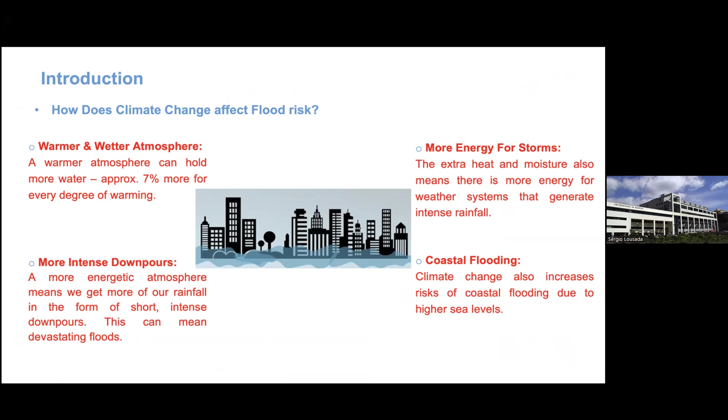So, what are the flood reasons? Heavy rainfall caused by natural weather events, insufficient forest, incorrect agricultural practices, inadequate design of drainage channels and structures, inadequate maintenance of drainage facilities, clogging by rubble brought by flood waters, and settlement of flood plains.

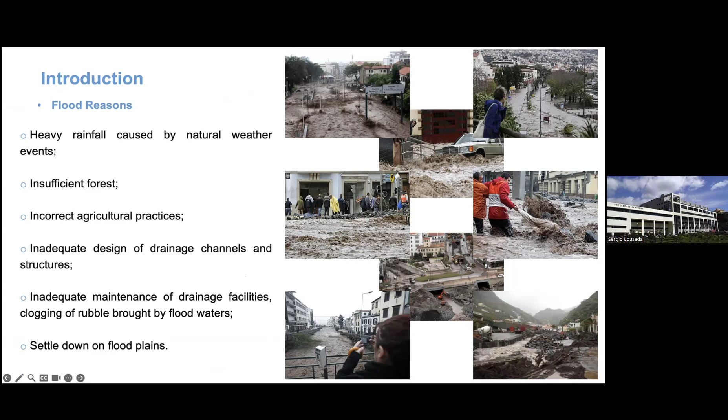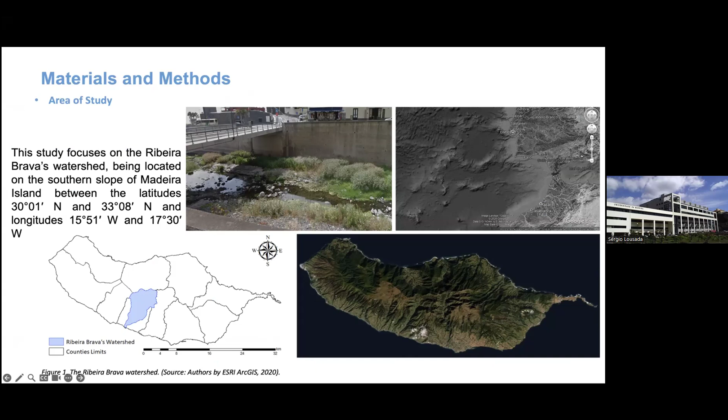So materials and methods. Next part, schematic of methodology. So we have six big steps to develop: literature review, watershed morphometric analysis, hydrological analysis, analysis of the drainage capacity of the river mouth, detention basin sizing, and definition of the roughness coefficient.

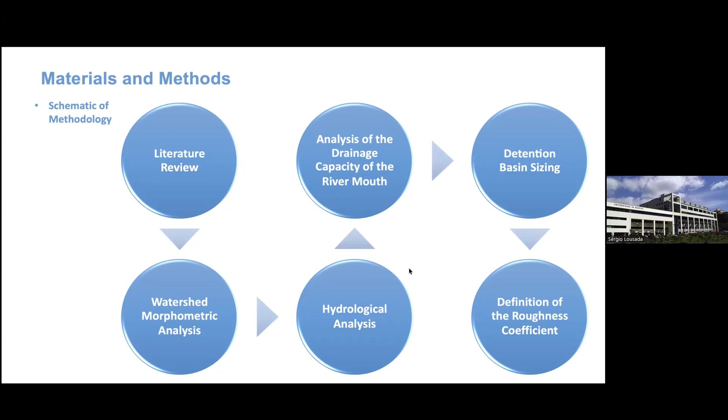So, materials and methods, morphometric characterization of the watershed. We need to achieve different values of different parameters to make an accurate characterization of the watershed, in this case of Ribeira Brava. Also, we need to obtain data about the last 20 or 30 years of precipitation. And all this information was given to me by the civil engineering laboratory present in Madeira Island. They give me this information, with which I can make the extrapolation of the precipitation for the next years.

So with this data, I can obtain the peak flow and I can obtain the drainage capacity of the river mouth of the mainstream of Ribeira Brava. And also, I can use two different methods, the Dutch method and the STH method, to achieve what is the most correct for the implementation of the detention basin sizing in the mainstream.

Also, I can make some modification in the roughness coefficient, that is, the materials that are put in the walls of the main streams. We can use concrete, it is the most correct to do. And also, this one is probably one of the best solutions because we have some limitations to make modifications in the mainstream, because the mainstream is already constructed and in its perimeter we have some streets and some buildings, so we have some limitations. We need to maintain every time the same height, so it's not possible to make this type of modifications. Next one.

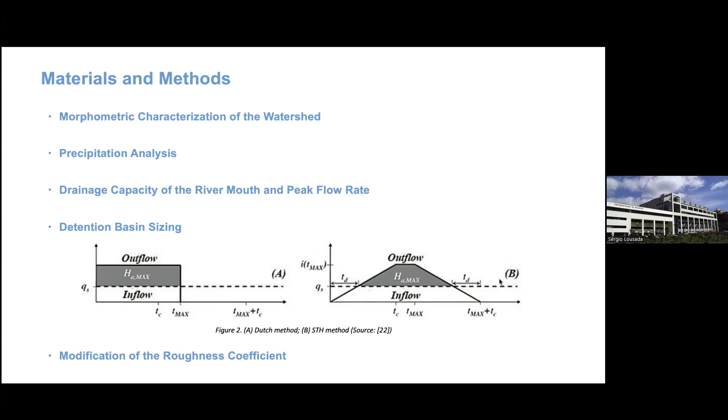So, like I have said in the last slide, we have to determine the area and some parameters, perimeter and length of the main watercourse. With the help of the ArcGIS software, we obtain all these parameters, and with this one, we can make the correct characterization of our watershed, in this case, the watershed of Ribeira Brava.

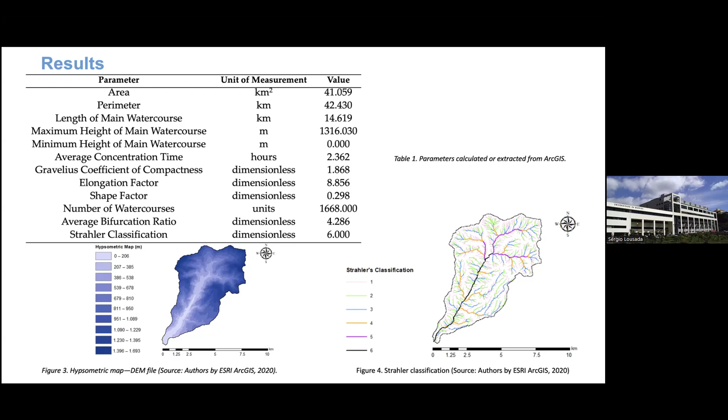So with the characterization of the watershed, with the help of the software ArcGIS, and also with the values of the precipitation, I can determine the peak flow rate with different methodologies, Forti, Rational, Giandotti, and Mockus. And with this one, I can apply the different methods to determine the detention basin sizing, and I can check if the length of our mainstream is okay or not to make a correct implementation of the detention basin.

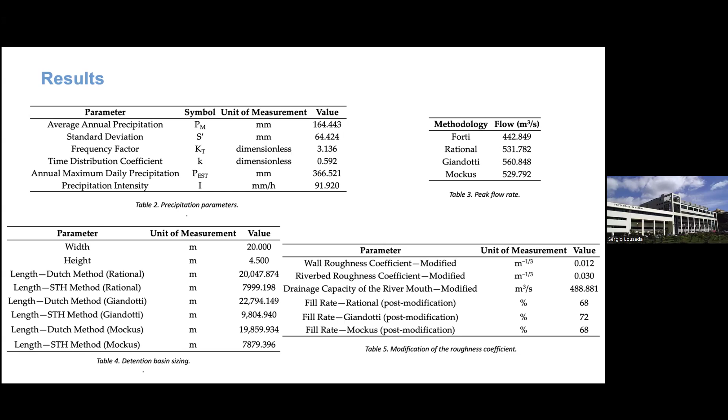This structural measure outcome is clear evidence that it may enable the river mouth to work below 85% of its full capacity. Moreover, to prove the accuracy of the Regional Directory of Territorial Management and Environment prediction, no change was made to the stream's cross section, namely its height and width. The only variable parameter was its length.

It was based on this concept that the Dutch method presents an abnormal oversize of the detention basin length when compared to the watershed main watercourse length. Therefore, according to this method, it will be needed to change one or both cross-section dimensions, and so it cannot be considered valid for the urban design settings. The exact same conditions were imposed for the STH method, with it showing a different and this time valid approach, since the detention basin length was shorter than the watershed main watercourse length.

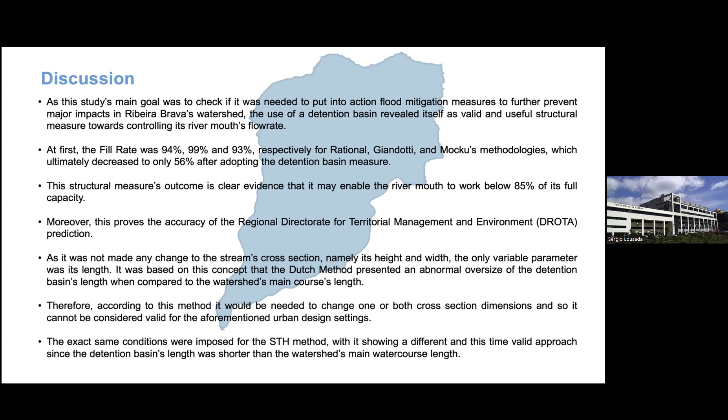The watershed drainage capacity is highly decreased by the presence of abundant vegetation and a huge number of sediments throughout the watercourse, resulting in a lower flow rate in an already low slope stream and river mouth. So also, we need to check this problem because we have some solid parts inside our mainstream, so we need to have this type of problem in attention to develop our solution. After all, this study leaves a clear open door to others that may complement its contents and methodologies by optimizing its techniques.

To improve the often complex urban hydraulic system and demand, it is also expected that new studies take notice of the need to reduce sediment deposition, as it seems to make a long-term impact over the watercourse's drainage capacity, and ultimately to prevent a major flood impact.

On the other hand, mechanical abrasion of these streams' walls, and the amount of time it often takes local public authorities to perform any type of maintenance, have been two strong reasons for how degraded the main course tributaries are, and subsequently for the lower water quality discharged, and therefore also need to be studied and improved.

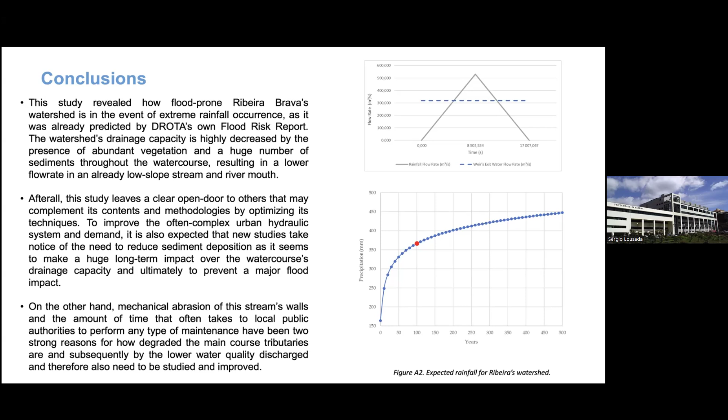So these problems need to be solved in the next years to obtain better conditions for our inhabitants in Madeira. So for my part, I end the presentation of this work.

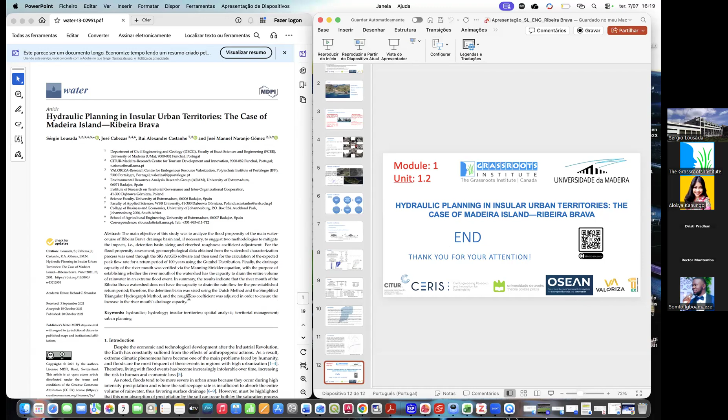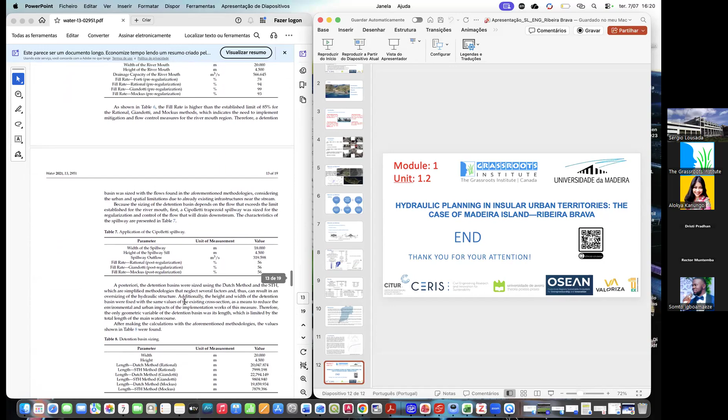Also, before I developed this presentation, I published this article in MDPI, in the journal Water, with my colleagues. So everything is published. You can check all the information. If you want, I can share this article in the chat, and you can check all the information to develop this in other locations of the world. It's a big work, but it's not impossible to do. So you can develop this type of work for other locations in the world.